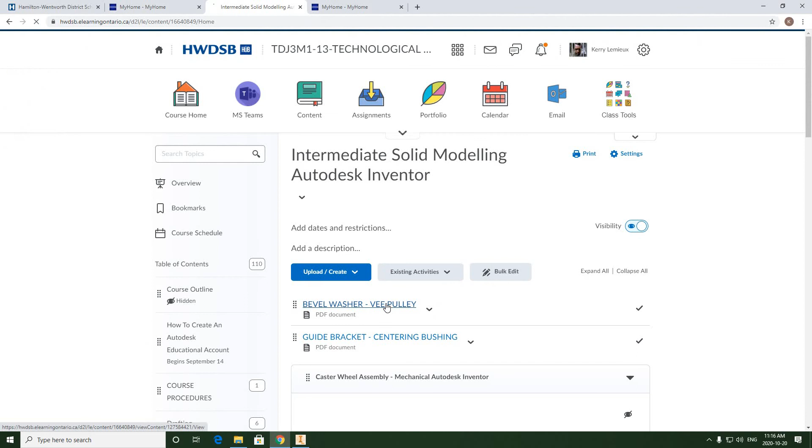We're going to be copying the layout that we see with the bevel washer. So we're going to be creating our front view, our top view. We're going to create a better looking isometric view, and we're also going to create this view that projects off the top of the 30-degree surface on the bevel washer, which is called an auxiliary view. So we're actually going to create this view as well.

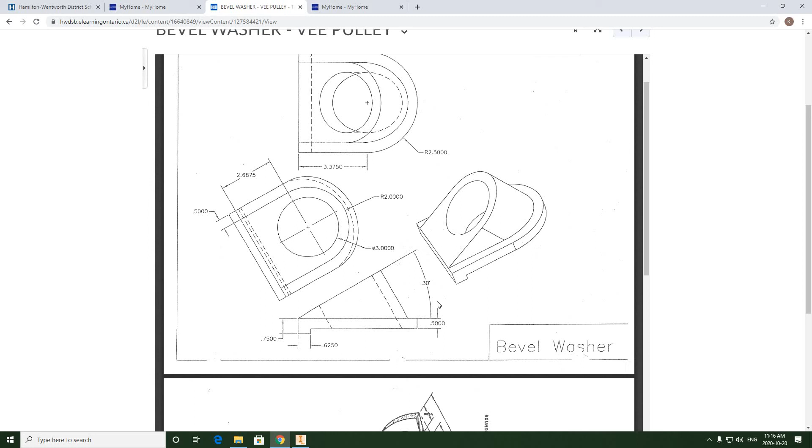The dimensioning is going to be kept fairly similar. We are going to just clean it up a bit and make it look a little better. And we are not going to use as many decimal places. 4 decimal places is a bit excessive.

And we are going to try and keep dimensions that are between views outside of views. This dimension could easily be shown up here. There's no advantage to keeping it crowded with this auxiliary view.

And things like you see here, this 30-degree angle, this arrowhead should line up with this dimension here, right? So we're going to be doing a little bit of minor cleanup work like that, make sure that dimension spacing is consistent. This one is closer, this one is further away.

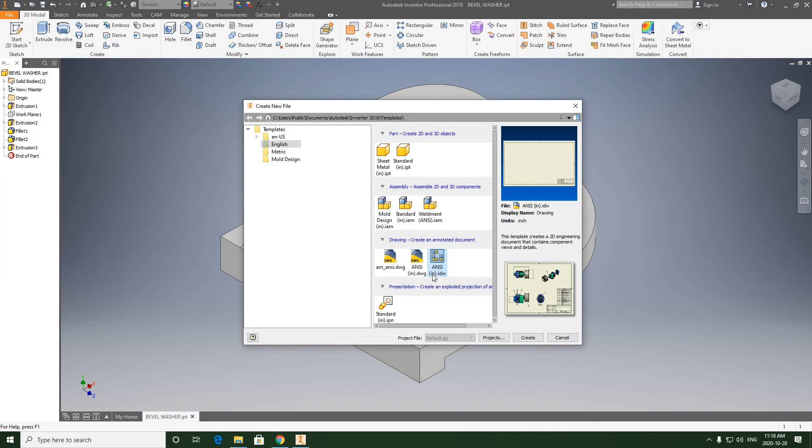So we're going to get started. You can open up the bevel washer model and go to File, New, and make sure we're in English, and we're going to create ANSI inch IDW for our drawing file.

Now the D size sheet is too large, so we're going to take a look at a C size sheet. And we have this. All right, so we're going to just clean this up a bit. Let's pull our top view down.

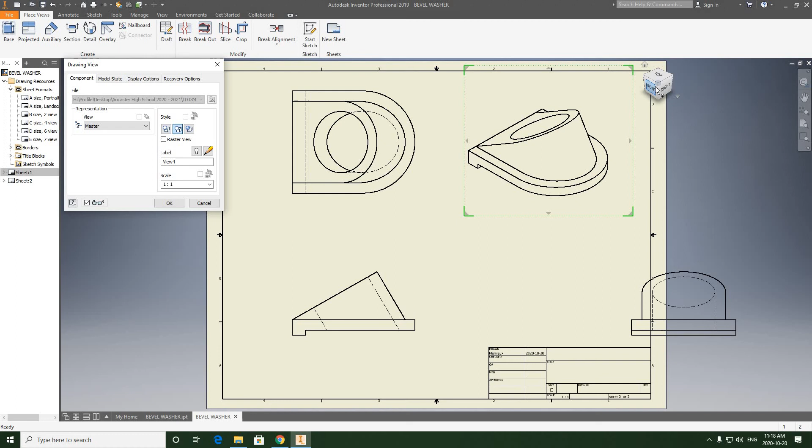And this isometric view, we can double click it and change its orientation. So we can look at this from the front, and then we can hit this corner here, and that's the orientation I prefer. So we're just going to go into scale, and we're going to change this to 3/4.

So we're doing the same thing that we've been doing with the basic solid models. We scale our isometric view down to about 3/4. Now this view here, the right side view, we don't really need to have that one either, but we'll leave it for now. And to create the auxiliary view,

you go up here, and it's under the Place Views tab. So we find auxiliary here, select it, and then select the surface, and we can pull that view off just like this. And then left click, and then we can create it.

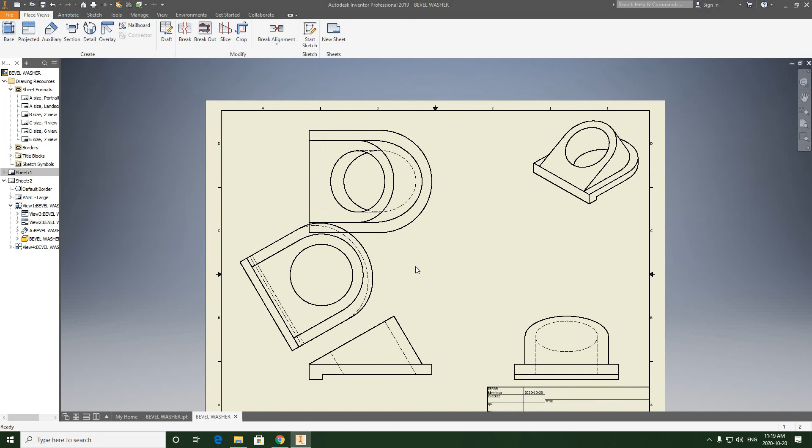So I think we're going to have to drop the right side view because this is going to crowd way too much. Right? I need to be able to move this view down, and this is going to run the right side view right into the title block, which is not what we want.

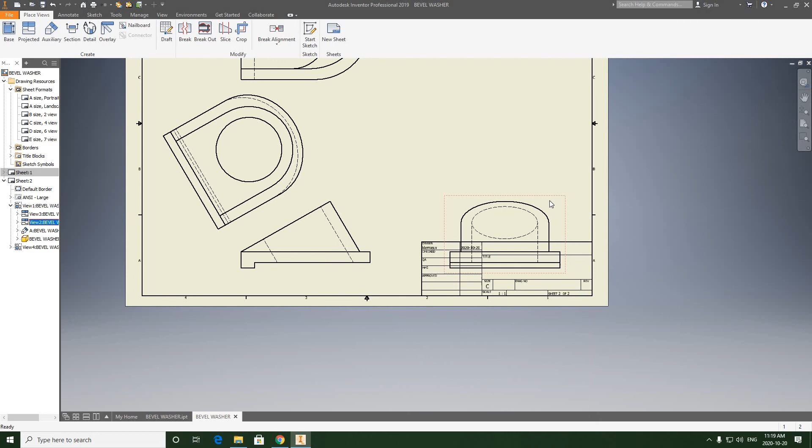So what we're going to have to do is go over to this view, right click or select it, and hit delete and hit OK.

Now this is the problem with the Inventor title blocks. I don't like the way they've designed them, where they keep them in a box in the bottom right hand corner. It would be better to have something along the bottom here that runs from this sheet border to here, and we're not basically losing all this space here. So one of these days I'll have to create my own custom title block for the class to use, when I can find that kind of time.

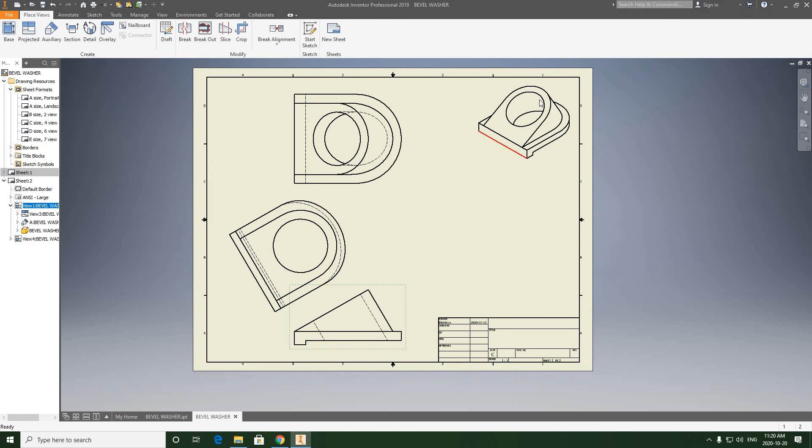So we have our layout. This pretty much matches our sheet. Again, we fixed up the isometric view a little bit. And what we need to do now is add the center lines here.

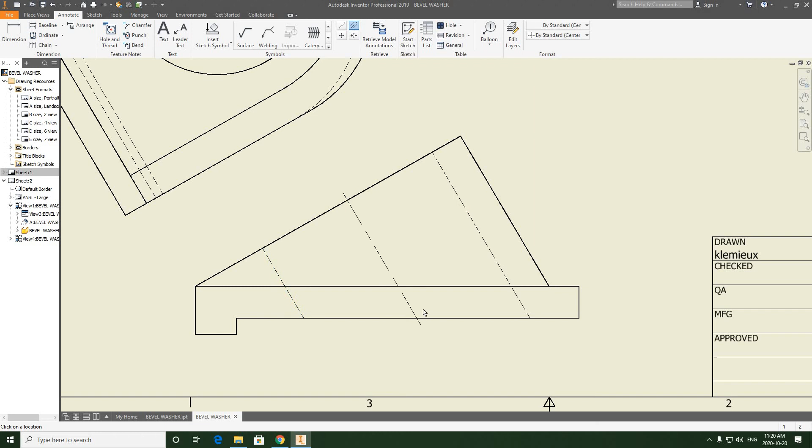So I'm going to go to Annotate, and I'm going to select Bisector, Centerline Bisector, and select this hidden line and this hidden line. That will create the center line going through that cylindrical hole.

We're also going to add a center mark here. And this part is symmetrical as well, so what we could do is run a center line here to here as well, but I don't want this one here.

So we're going to delete that one, right? I just want this one running into the middle, right there.

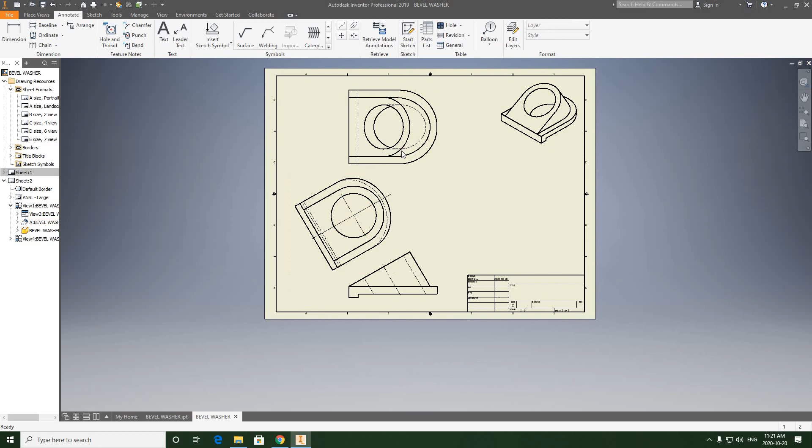Now we're not going to add center lines to this one per se, just basically because these are elliptical circles. So generally we don't add center lines to anything that is elliptical. So we're going to leave that alone.

But to get started, we're going to run a general dimension. So this dimension here I like, this 0.75, so we're going to have it come out here, and then we're going to run a dimension

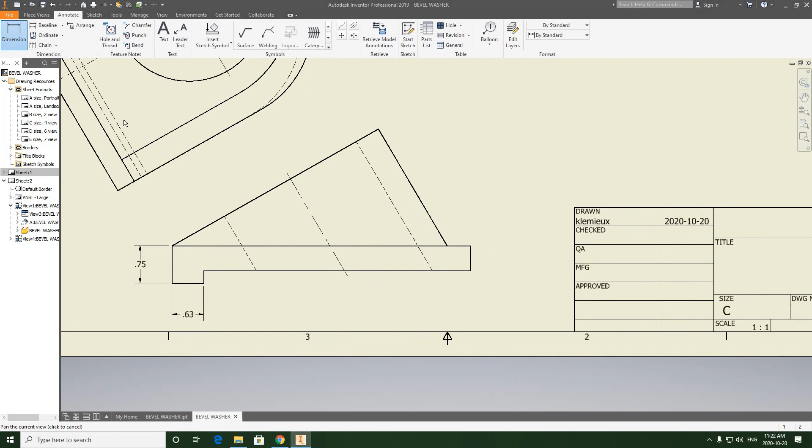from here to here. Right, and you see these ones on the sheet, right? They're in the same position. We also have this one here, the 1/2 inch.

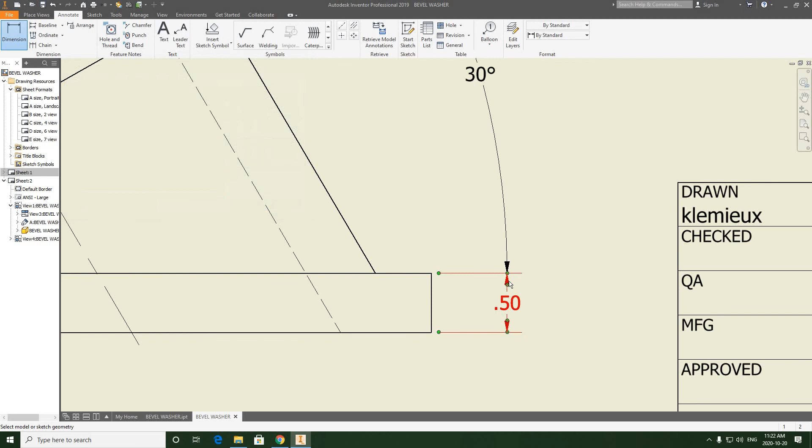And then we're going to run from here to here the 30 degrees. Now we want this to basically line up with that 1/2 inch, right? Because all dimensions should chain up when possible. There's no advantage to have this sit a little bit behind or a little bit further than this dimension arrowhead right here. So that looks fine.

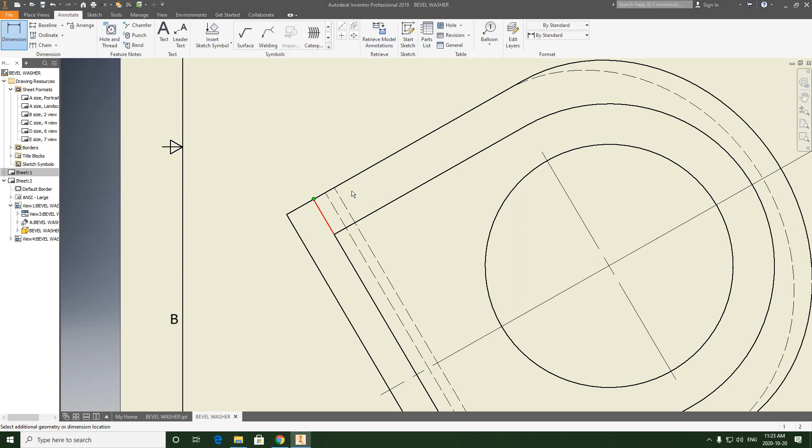And we also need to run a dimension from here to here, to 2.69.

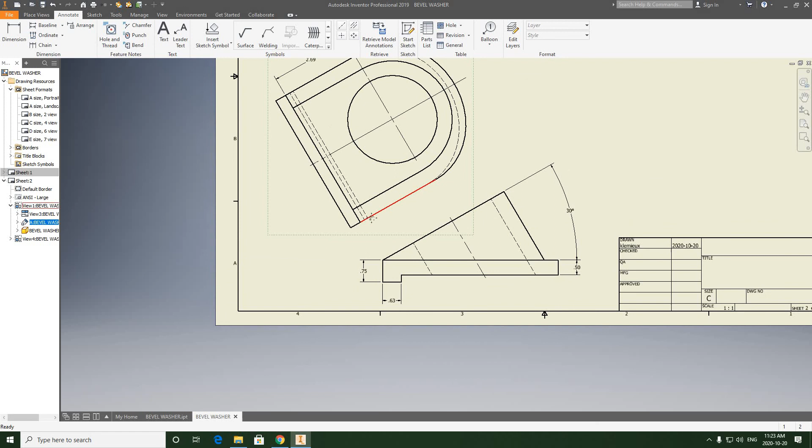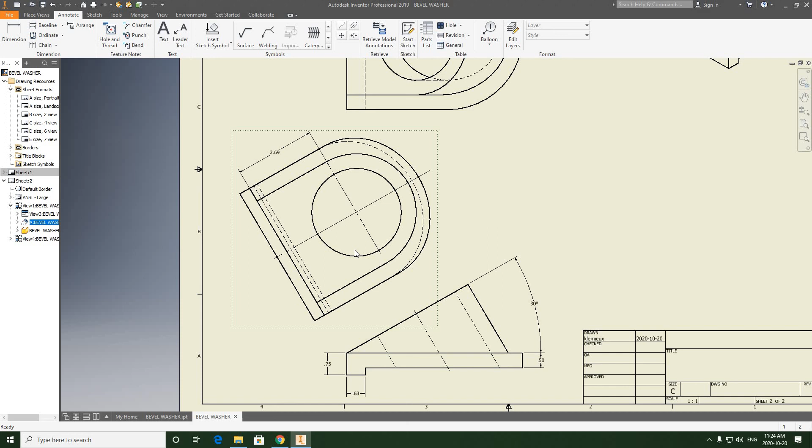We may bring that a little bit closer because we're trying to keep this consistent. When I look at all these dimensions, the spacing should be fairly consistent. I shouldn't have one way out in the breeze and then one super close. This is something that when I was checking the basic solid modeling drawing files submitted, I was doing markups and finding a lot of inconsistent dimension spacing. So that's something we really need to work on in the intermediate models and make sure we're doing it correctly from the get-go.

We're also making sure our center lines and our dimension extension lines have that gap. If I click here, this line and this center line, it's going to automatically leave the gap for me when I create the dimension.

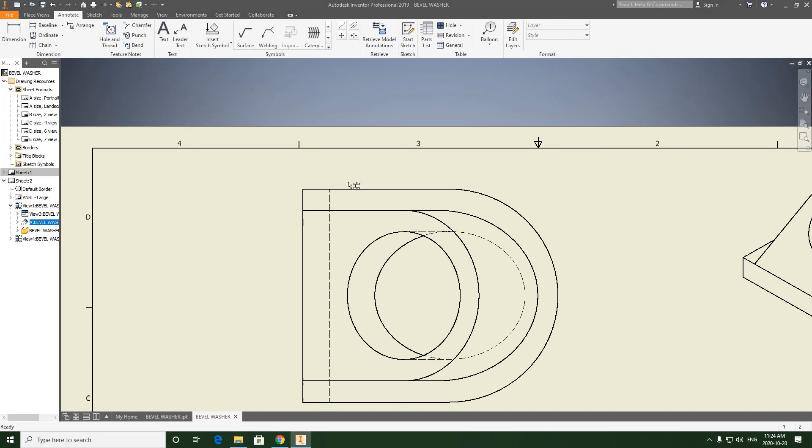We're also going to run a radius dimension here. Again we're going to try to keep the spacing consistent. This one you've got to eyeball to look similar to the others. So we've got the radius 2.50, and we're also going to run a dimension from here.

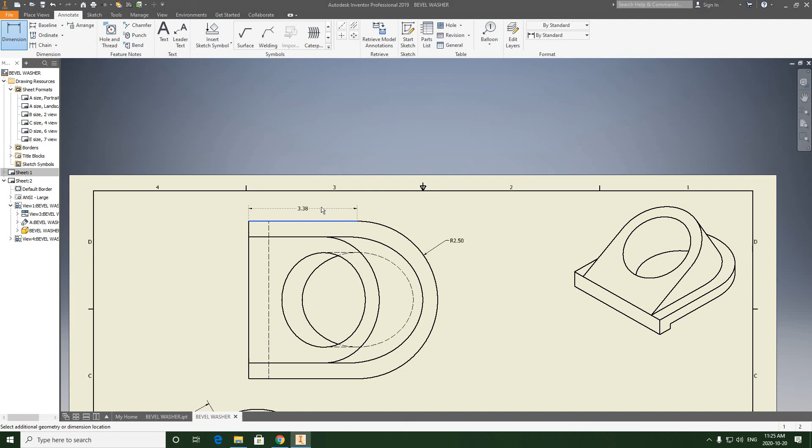Let's redo this one from here. We're just going to select a line like that. All right, that's what we need. Just pick that line and then pull the dimension up. Again, it's a bit crowded, but it still fits.

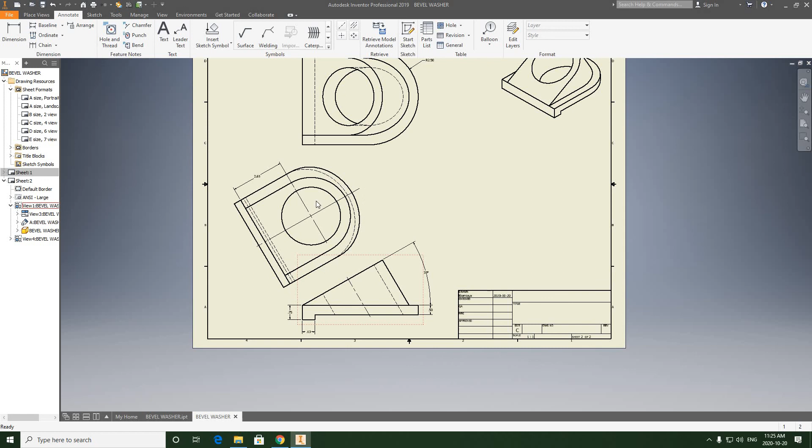We can even drag this auxiliary down a little bit to keep the spacing between them fairly consistent, just by looking at it by eye.

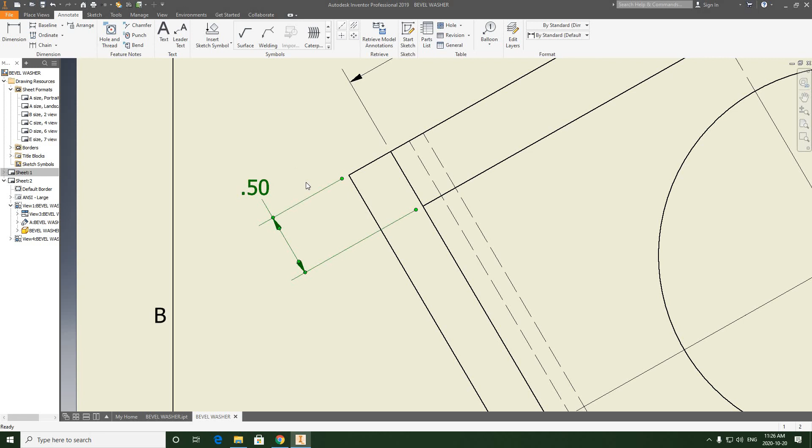We're also going to have a dimension from here to here, aligned. Now watch how this one was created - I picked this line, and it should automatically give you that gap. This extension line should not be covering the object geometry at all. One thing I need to do is pull this down a bit so the spacing is consistent like we've seen in other places.

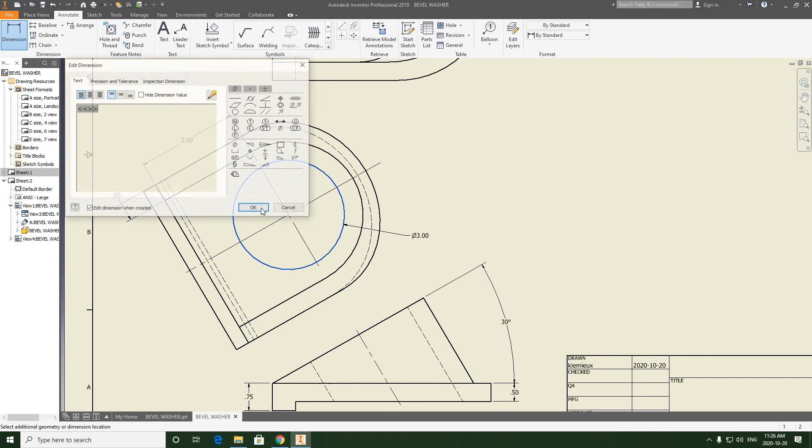Now we also need to identify our radius here, and this diameter circle as well. So we're going to pick this one. This is obviously going to have to go between two views, so we'll try to keep our spacing consistent like we did up here.

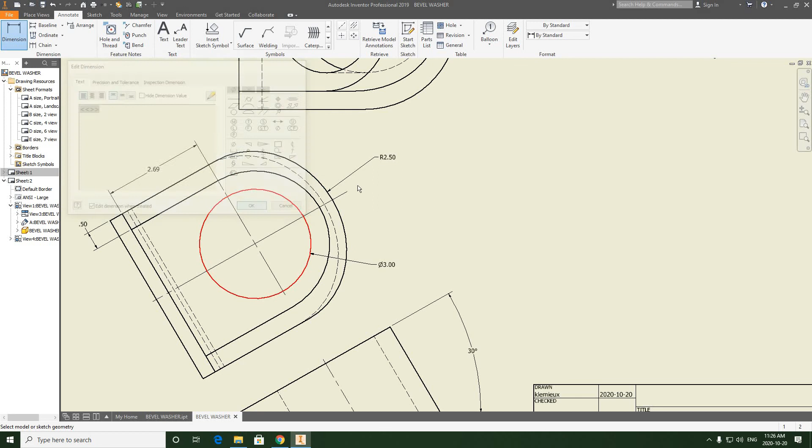We're also going to create the radius 2 dimension here, and try to line this one up as best we can. We don't want it sticking way out or really close - we want it to rest fairly in line with that diameter symbol. The R should be kind of in line with the diameter symbol as best as we can get it. And we have it right there.

So we pretty much have everything we need here. Just taking one last look at this. You know, we could have an overall dimension - we'll have to put it between views.

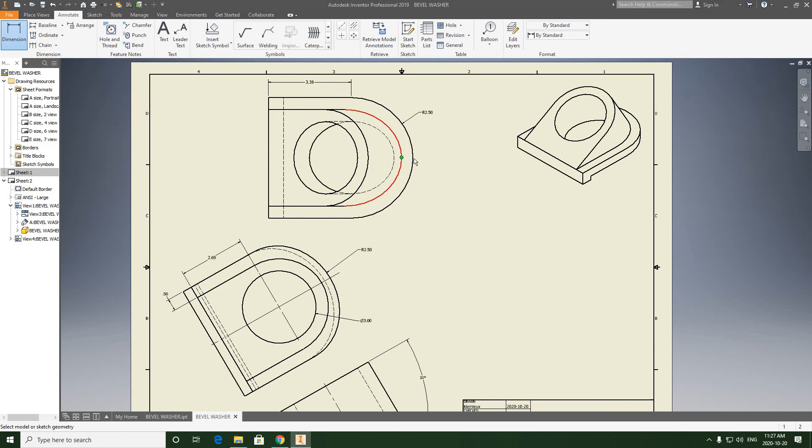Normally we fit things like this up here, but we're pretty crowded for space in the C-size title block because of the auxiliary view. So we're going to have to make do with this dimension being down here.

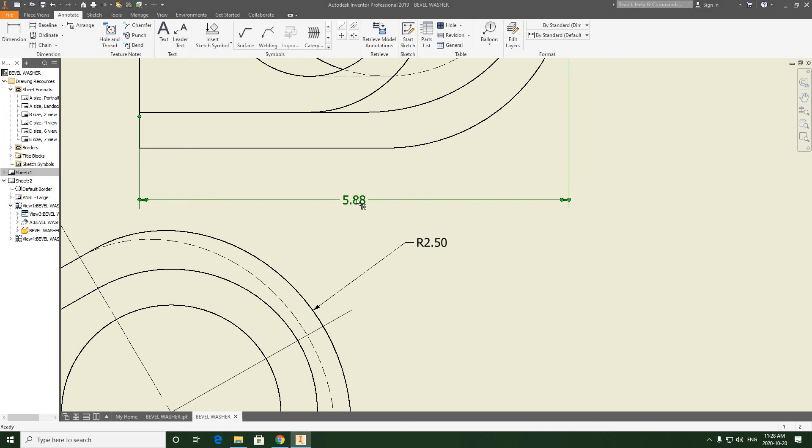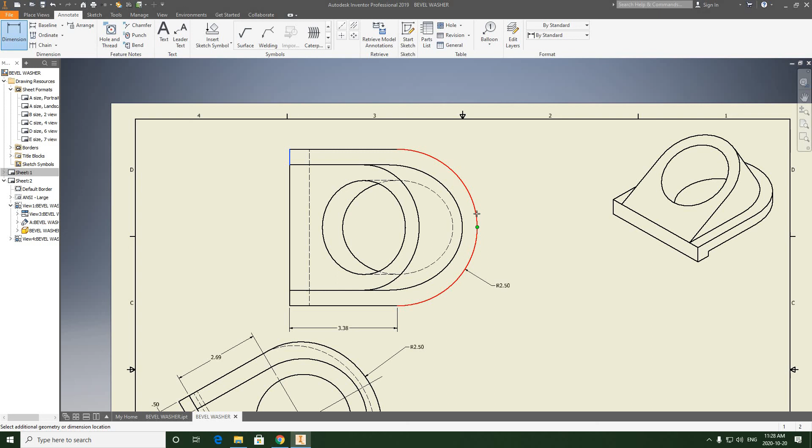Actually, a better idea - let's run this dimension that we have above down here, consistently. And then we'll take this one, and what we're going to have to do is move this dimension down here like we originally saw on the sheet, and we'll just add this dimension here. All right, I think that looks better.

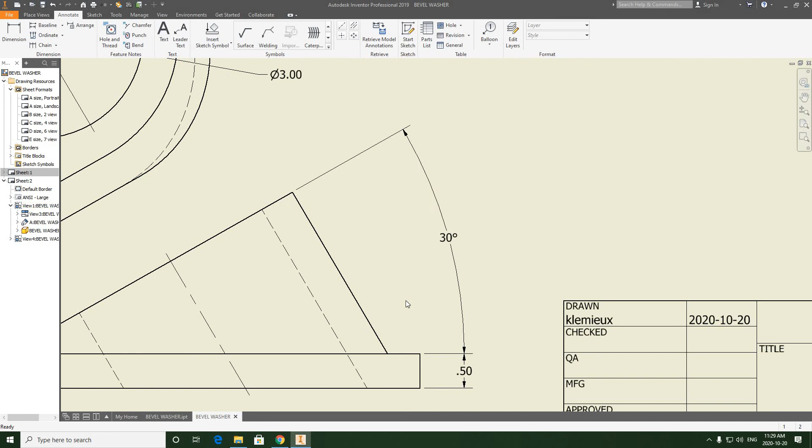So we've got our overall length, and our radius value here. I would call that dimensioning done at that point - that's pretty much all you need for this one. So we're going to do the title block, and that's going to be it.

So we're going into iProperties, summary, changing my name - everything has to be all uppercase. Title is the Bevel Washer. Company is Ancaster High School. Project - the revision on this is 0.

Every time you make a change to a drawing, once it's been given back to you, the next time you would rev this up to 1. So if you have a markup that needs correcting, when you go in to the title block, you would change that to a 1. Every time you revise something that's been released, it has to be revved up. That's what that means. This is an original release, so it's 0.

Checked by - got my checker who's going to check my work, the date they're going to check it, project, and part number. This is 3M1, and this is our 4th drawing file, so it's 04.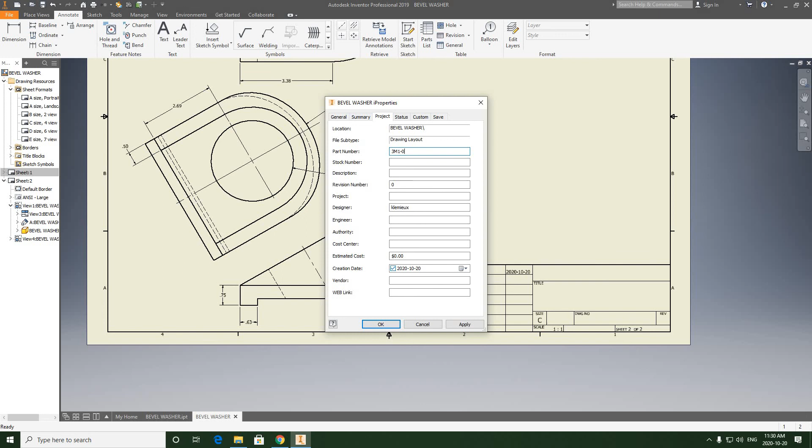Apply and close. All right, let's take a look at this. Drawing number looks good, revision is good, C-size, title, the school, who drew it, and who's checking it.

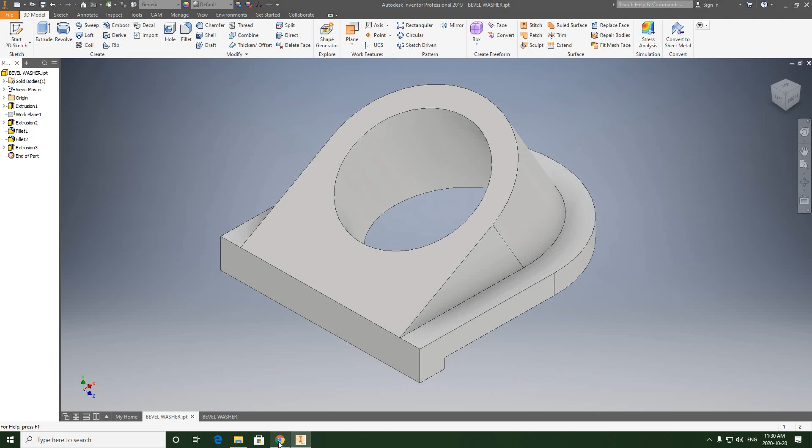Perfect. So it turns out I pretty much did copy the layout exactly. I just added an overall dimension - everything else should be exactly where it is on this sheet here, just a little better spaced. It's very helpful to have an overall dimension when you're creating a drawing file.

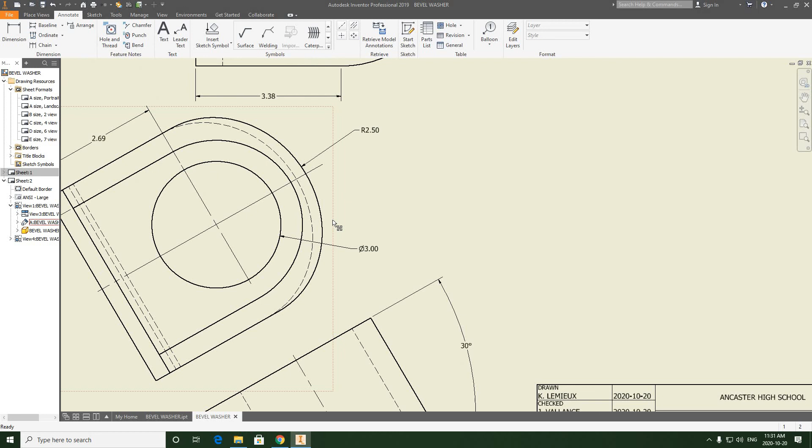I'm just going to move that down a bit to keep the spacing not so crowded. And that's it - after you've completed this, it's ready to be submitted. So we're going to save this. Bevel washer will have the same name as the part file.

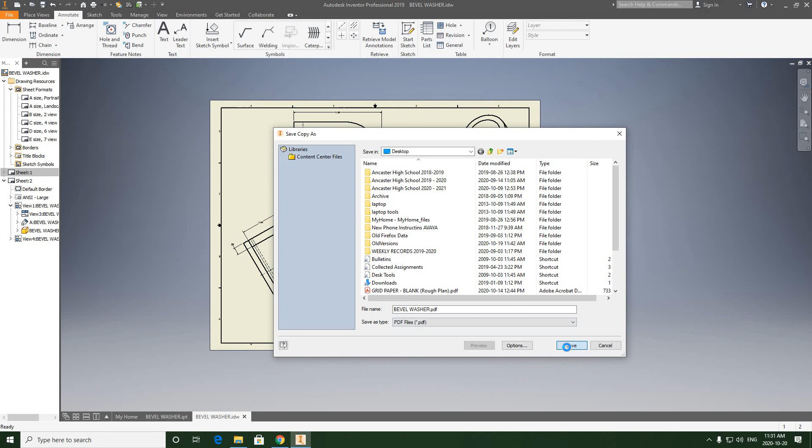Then I'm going to go to File, Save As, but not click Save As - go to Save Copy As. Then go into Save As Type, select PDF, and hit Save. That will create my PDF copy. And then I've got these 3 files to submit to the Dropbox.